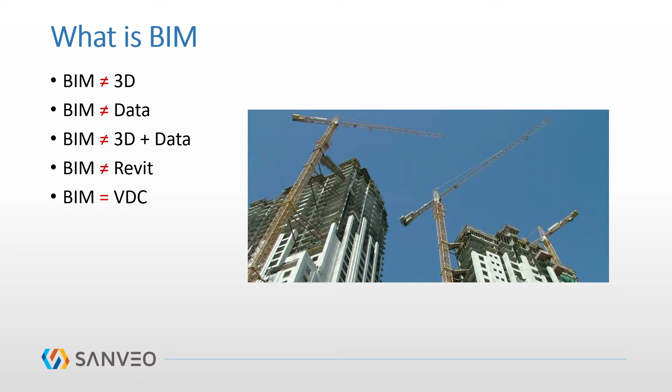So now that we understand what BIM is not, here is a textbook definition for BIM. This is one of the first definitions that I ever saw about BIM. I originally saw this definition over 15 years ago. I know that there are many definitions out there, but this definition makes sense to me, so let's just read it. Building Information Modeling, or BIM, is the creation and use of coordinated, internally consistent, computable information about a building project in design and construction. There are a lot of C words in this definition: coordinated, internally consistent, and computable information.

Coordinated is referring to the trades that are typically coordinating with each other on BIM projects. They are looking for interferences and trying to make sure what they are installing is not interfering with other trades. So typically, a BIM project is more coordinated than non-BIM projects.

Internally consistent refers to the fact that, typically on a BIM project, the information for the project is coming from a single source, the model. The model contains all the data and information. For example, if a door schedule needs to be updated, you do not update the schedule. You update the model, which then automatically updates the schedule. So the model and the schedule are always in sync with each other. This makes a BIM project more internally consistent.

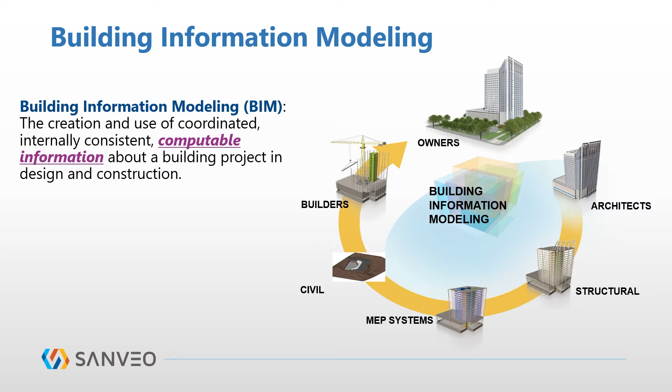If we take a look at traditional CAD for a second, we will see that traditional CAD is first of all focused on production drawings. Typically, when a project starts using traditional CAD, the team starts by saying, okay, we need a floor plan, an elevation, some sections, and so forth. They're more focused on the drawings as opposed to the design.

Traditional CAD also typically has the project information stored in multiple files and formats, as opposed to all the information being stored in a single model. Traditional CAD is also difficult to manage changes late in the design. And finally, there's a risk of data loss during multiple discipline coordination.

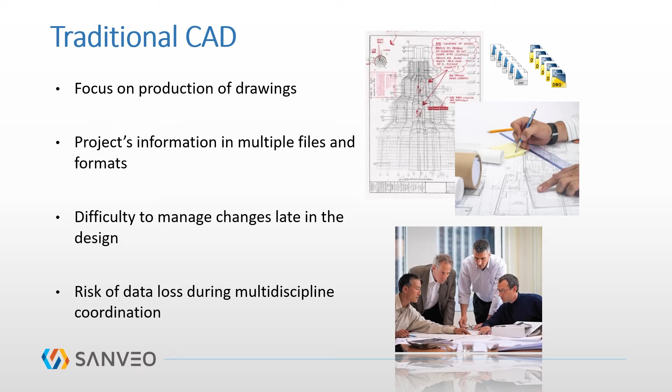The traditional CAD documentation process consists of multiple drawings and drawing types. We have floor plans, elevations, sections, schedules, details, and maybe even a 3D model. All of these drawings are created in separate drawing files, and then they are placed onto sheets. This makes up the final documentation.

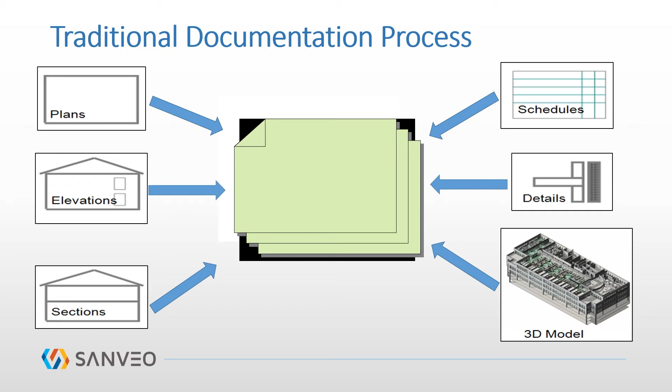When we compare that process to a BIM process, it's completely backwards. Instead of having separate drawing files, we have a single model. We develop the model, and out of the model we get our plans, elevations, sections, details, schedules, and the drawing set. This allows us the 'change it once, change it everywhere' mentality.

When we make changes to the model, it automatically updates the floor plans, sections, details, schedules, and our drawing set. With BIM, we do not have the problem of an element showing up in a schedule that has been deleted from the model. Once it's been deleted, it's deleted in all views of the project.

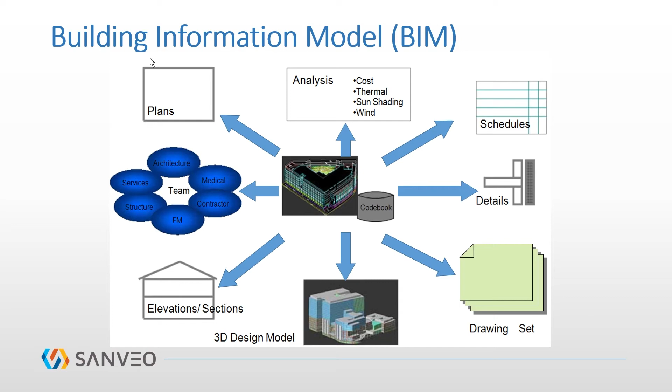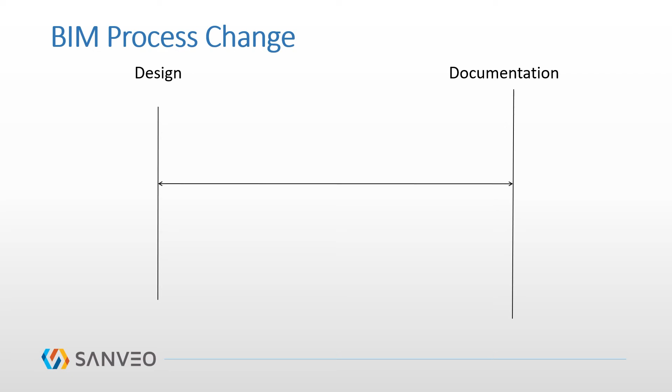The difference between a CAD process and a BIM process leads to a change in the way we approach projects. As I previously stated, the CAD process starts by thinking about the documentation, whereas the BIM process allows us to focus on the design, and the documentation is a byproduct. BIM requires a new way of thinking.

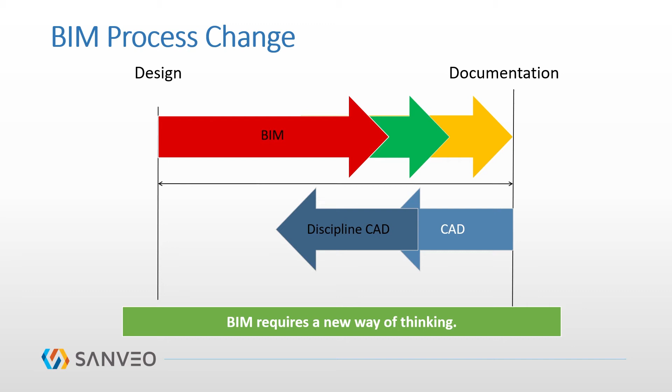To give us a better understanding of the importance of BIM, I want to introduce the MacLeamy Curve. This graph has been around for a long time, but it's a good tool to use to understand why BIM is needed. The bottom or horizontal part of this chart represents time.

We have the different phases of a project: pre-design, schematic design, design development, construction documents, procurement, construction administration, and operation. The vertical leg of this chart represents the amount of effort or the amount of effect we can have on a project.

The first curve is indicating the ability to impact cost and functional capabilities. Early on in a project, changes can be made that will drastically have an effect on the cost or function of the project. For example, we can change the design from a multi-story building to a single-story building.

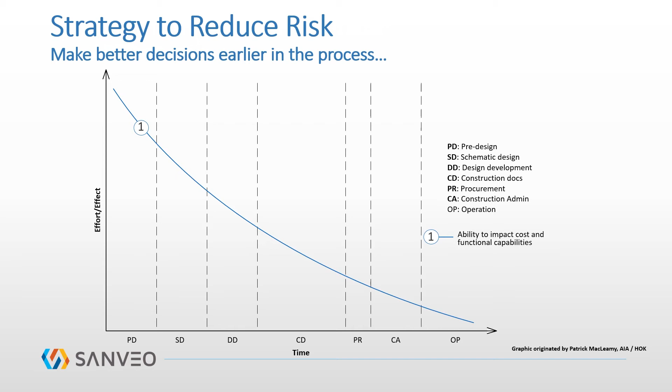As the project continues, we are not as likely to make drastic changes because we are too far along in the project. The second curve represents the cost of these design changes. As the project progresses, changes that are made will become more expensive.

The third curve represents the traditional design process. Majority of the work is done on the project during the construction documentation phase. This is where designers are in crunch time. They will pull in extra people to get the project finished and out the door.

But if we look at this, it's past the point in the project where we can make changes, or the cost of these changes will not be affordable. Which brings us to the last curve.

This represents the preferred design process. It is pushing the bulk of the work back to an earlier stage of the project, which will allow for changes to be made that will affect both cost and function while the cost is not too much.

This represents the BIM process. BIM allows the design to be focused at the beginning of the project, and it allows the majority of the work to be done prior to crunch time in the project.

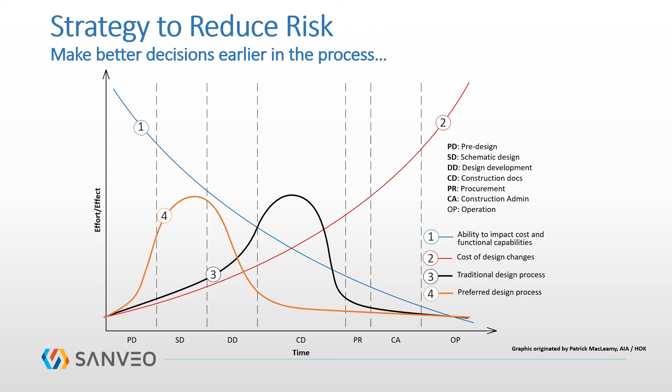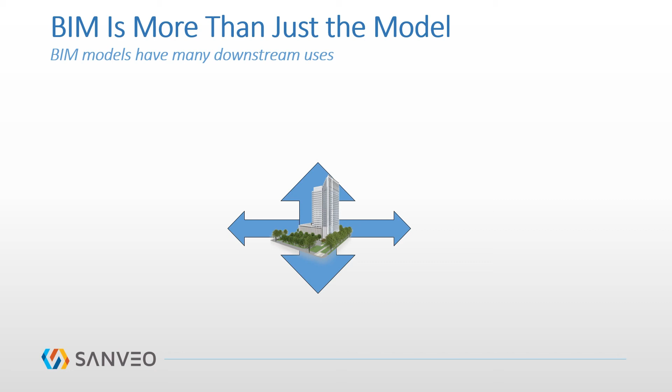BIM is more than just a model. There are many ways that the model can be used to benefit the project. Here are just a few. Conflict resolution allows contractors to find clashes with trades prior to construction.

Quantity takeoffs: the model provides exact quantities of all elements in the model. If items are added or removed, quantities are instantly updated.

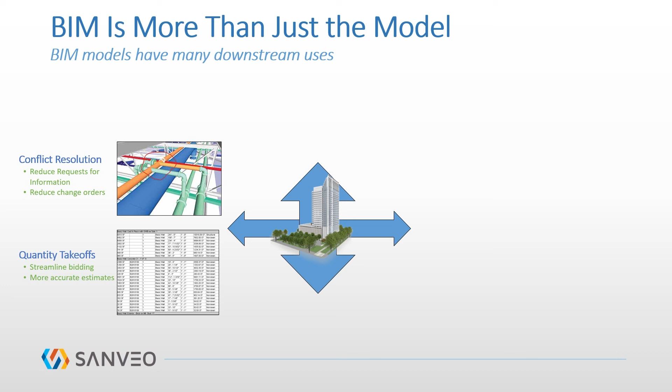Simulation and analysis: there are many ways the model can be used in analysis tools, such as lighting analysis, airflow analysis, or even acoustical analysis.

Context line of sight studies, just being able to see or visualize the building. Civil and site designers are able to model entire cities, so being able to see the project in a larger context is critical.

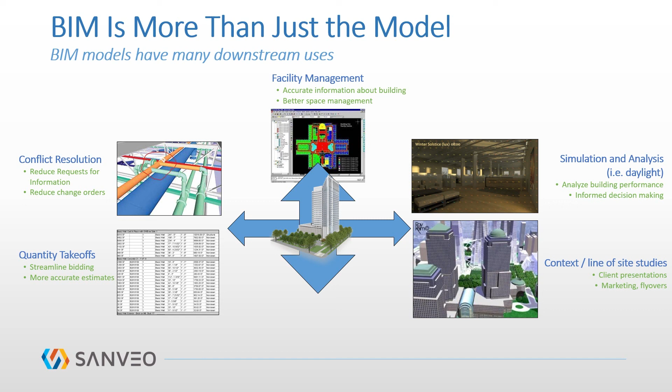Facility management: owners are taking the data from the model and plugging it into facility management software to operate the facility after construction is completed.

And of course, construction documents and specifications. We are able to compile different views of the model onto sheets to make up our documentation.

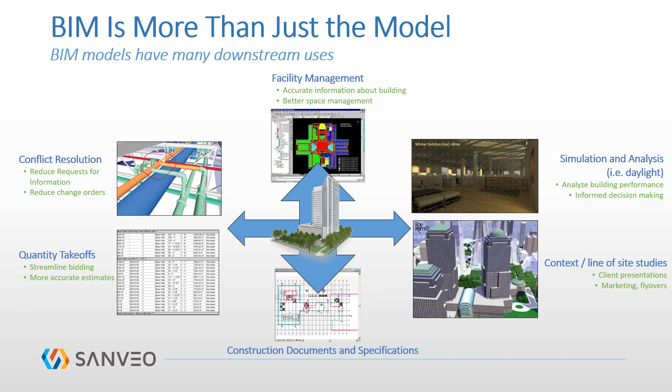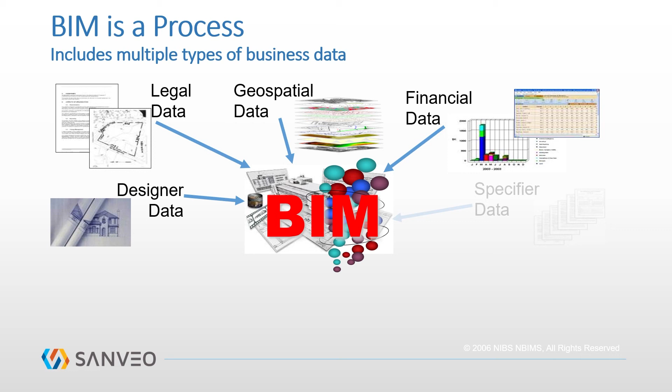In addition to what we can get out of the model, the data we can input into the model is endless. Depending on what the model is going to be used for, we can populate the model with additional information. Here are some of the types of data that could be inputted depending on how it will be used downstream.

BIM is so much more than just floor plans. This is where the 'I' in BIM really comes to life, and the information is the key to the process.